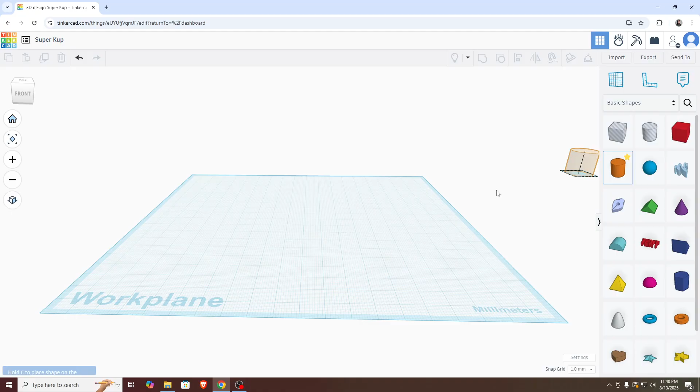In this lesson, I will show you how to create a 3D model of a coffee mug here in Autodesk Tinkercad. So the first thing that we need to do is place a cylinder in our work plane.

If you want to resize it, just hold shift and then release or drag the control points, like this. And if you want to adjust the sides to make it smooth, we have here attribute editors or properties. You can actually slide this to make it smooth.

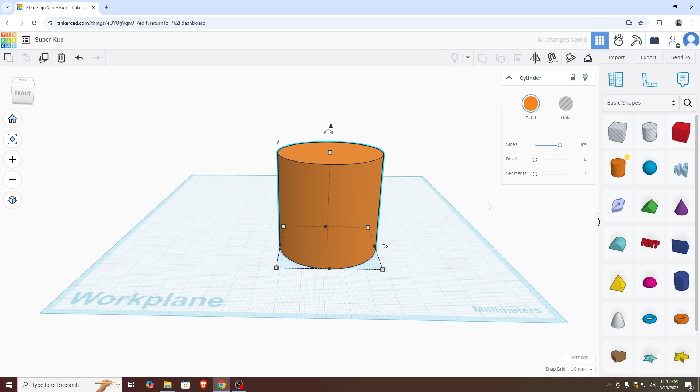Once done, we need to place again a cylinder, and then we will resize it a little bit smaller than the cylinder that we placed earlier, just like this. And we need to also adjust the sides to make it smooth.

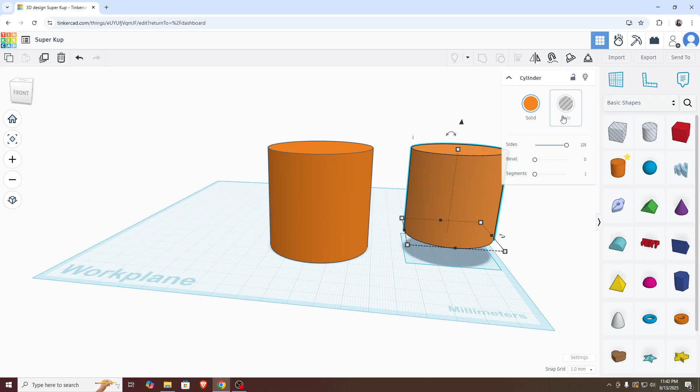Now, instead of solid mode, we will turn this into hole, just like this. Just click this hole and then place it nearby the cylinder that we placed earlier. So it should be like this.

The reason why we need to change it into hole is we need to drill the body of our coffee mug. So that's why we need to change it into hole.

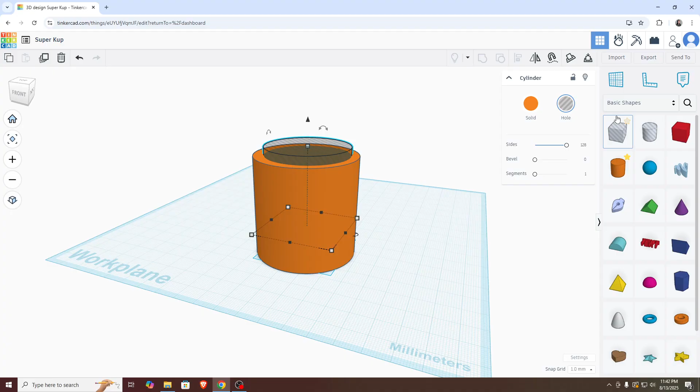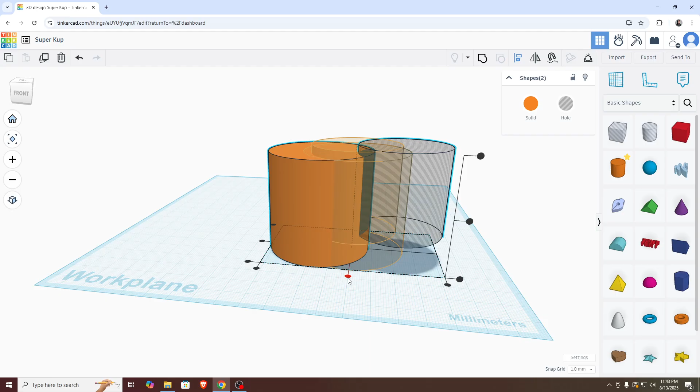But if we want to center it, what we need to do is highlight these objects, and then we will find the align, or we have a corresponding shortcut for that, which is L. Just click, and then we have points. Just click the center part, just like this, to make it accurately centered.

Okay, so once you're done with this, next thing that we need to do, of course, we need to have a holder or handle of our coffee mug. So we will use the torus here.

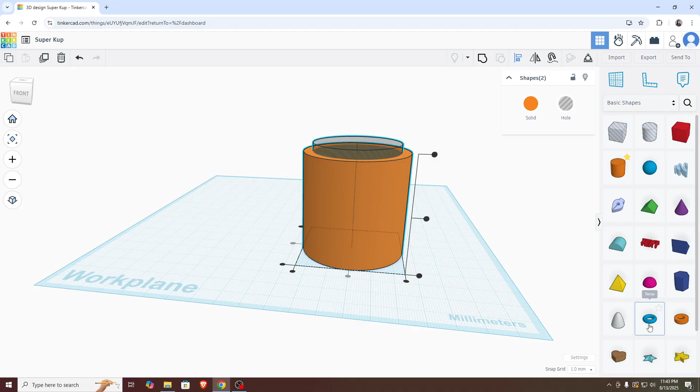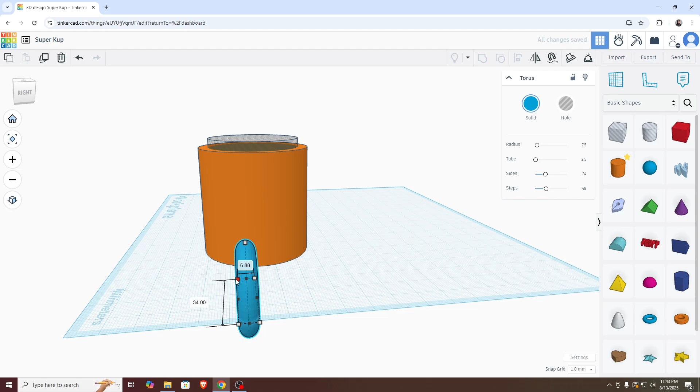You can resize based on your preference. Okay, so resize, rotate into 90 degrees. You can shrink it. You can place it nearby in the body of your coffee mug, just like this.

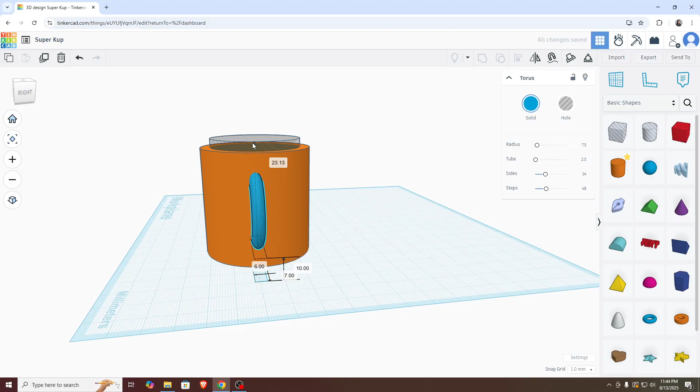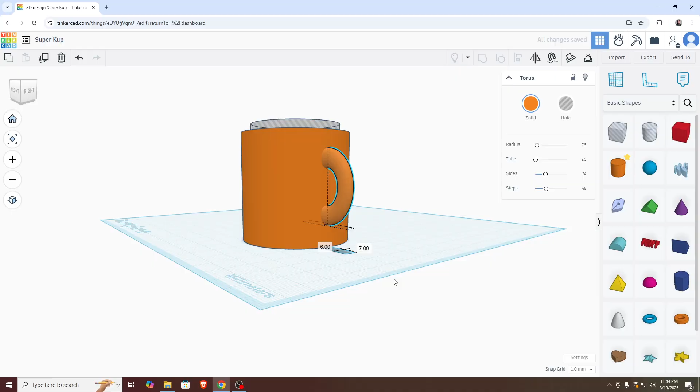Okay, so we need to change the color. Let's see, here in Autodesk Tinkercad, we can actually set different colors based on your preference. So you need to explore the different presets here. For example, I want this color.

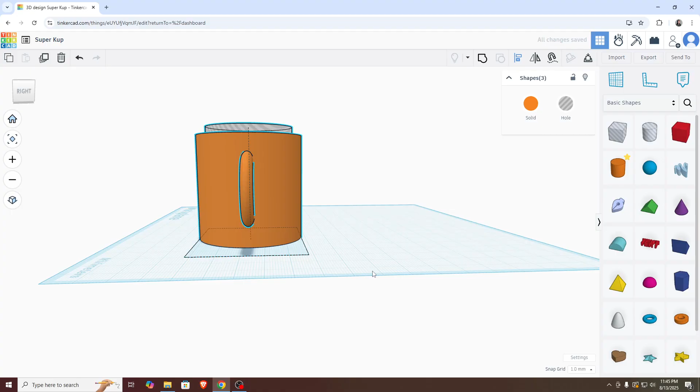Now, if we want to accurately center it, same procedure that we discussed earlier. So highlight all of this object, and then click the align, or use the corresponding shortcut, which is L, and then click the center control, just like this, and you see it is properly aligned.

Now highlight again all of this object, and Control G. Okay, so in this case, we now have a simple 3D model of a coffee mug using Autodesk Tinkercad.